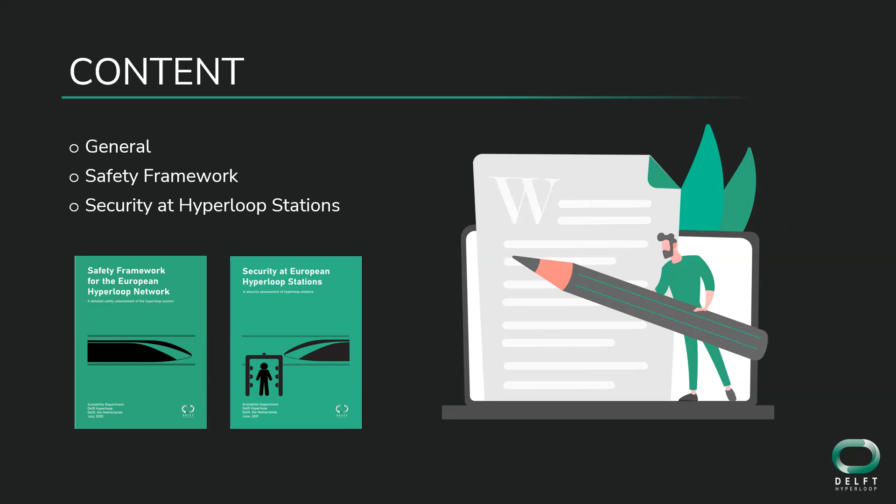This is us. We are a team of 39 highly ambitious students. Most of us take a gap year to work in this team. We're called a TU Delft Dream Team, and we work one year towards a model. We have different departments. The engineering department works on this model, integrating different subsystems into a working pod.

With that pod we're going to participate at the EHW, which is the Hyperloop competition, and we are also part of that competition, not with the pod, but with research that we perform. So we are working one year towards the EHW, and we're working on two research papers. And this is who we are.

Tonight, we represent Scalability. That's our department's name. And we are with two more. The mission that we have is that we want to make an impact by exploring a realistic implementation of the Hyperloop system. So, like I said, we are the research department of the team, and we're working towards the realization of the Hyperloop system. The goal is to write the two papers that are going to participate in the competition. One paper is focused on a socio-economic topic, and the other paper is focused on a technical topic.

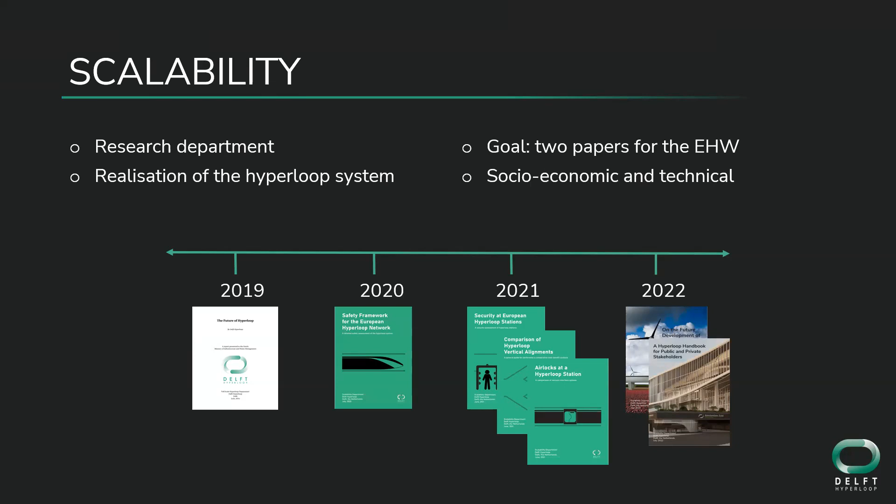Research has been done in the past by our team, because every year the team switches, so all students are replaced with new students. So we're going to present the work of a team in the past, and that's about safety and security. It's a very important topic as it's a new technology, and the pod is possibly filled with passengers, which makes it even more important to have thought the safety and security really through.

It's also very broad because it should answer every question of what happens if. So what happens if there is an illness? What happens if there's an explosion? What happens if, well, you can fill it in for yourself. There are a lot of possibilities. So what we will discuss tonight is a general safety analysis and security of the Hyperloop station. I will do the first part and Twan will do the second part.

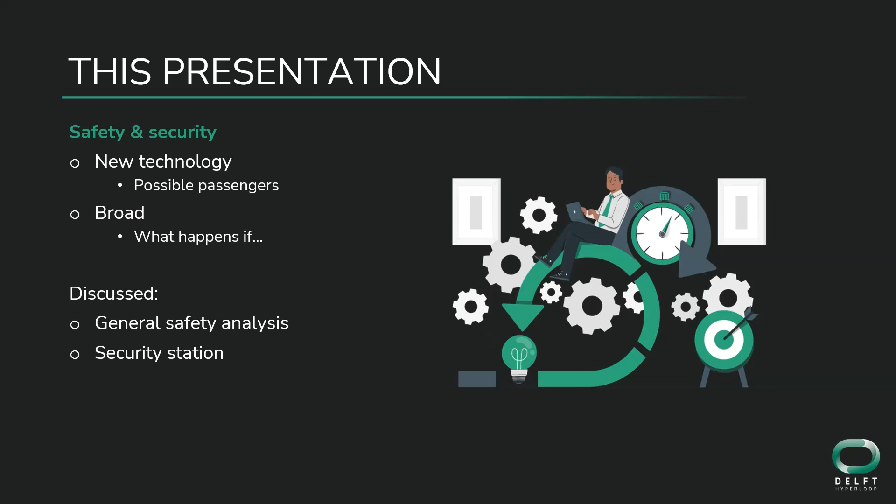What Delft Hyperloop did, they wanted to have this safety analysis, but for that to be done, you need the safety vision. The safety vision states the European Hyperloop system shall have at least the level of safety of European commercial airlines in terms of passenger fatalities per billion passenger kilometer.

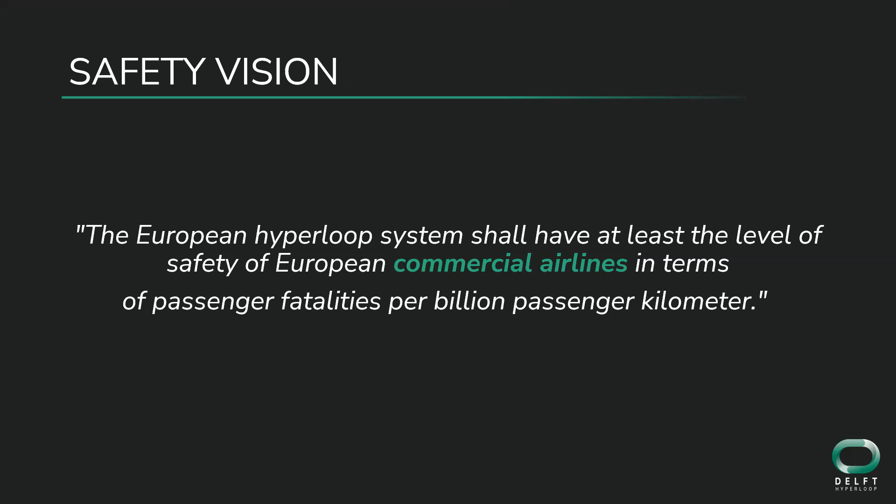Because it's a new transportation mode, a lot has been compared with what's already known. So in this case, the vision is compared with airlines because it has the highest safety of all transport means. So that's why the Hyperloop also aims to be that.

This is the safety framework that has been used. Every part shows a way of how to work with safety and what needs to be done. So you have different aspects. Proaction means an unsafe situation needs to be prevented, and that can be done through the circle: prevention, preparation, mitigation, intervention, aftercare, and evaluation. By working with that cycle, you can ensure safety.

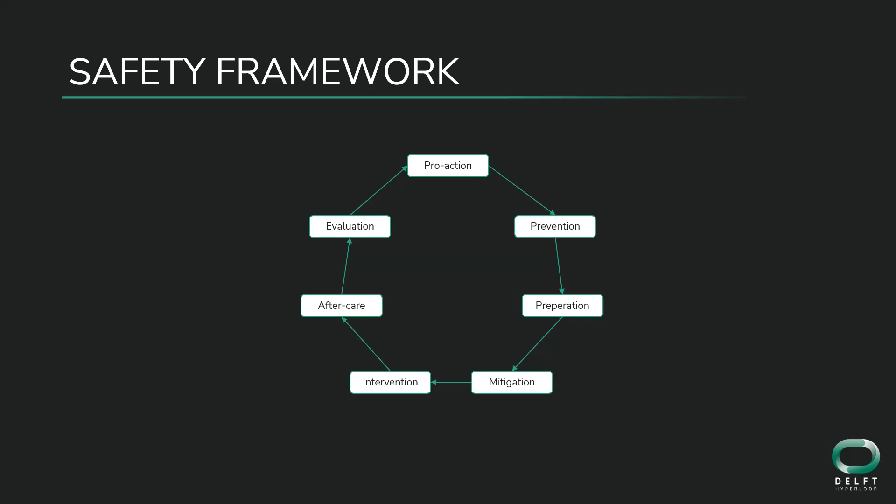So from the safety vision, a safety goal was defined, which states the passenger fatality per billion passenger kilometer will be 0.06 or lower. The 0.06 is also compared with airlines, because the passenger fatality there is 0.06. So that's what Hyperloop should aim for.

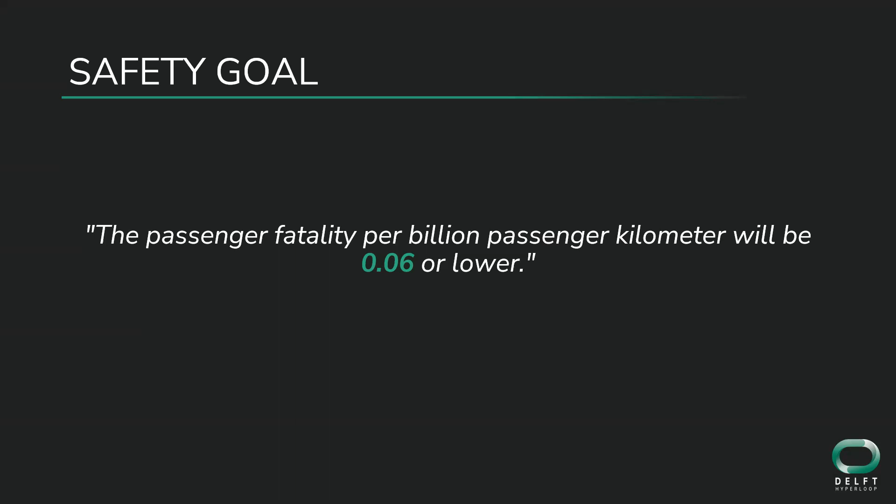Now about emergency scenarios. So there are quite some. The first one is fire in the pod. This can, for example, be due to the systems heating up, like the batteries. So that needs to be taken into account.

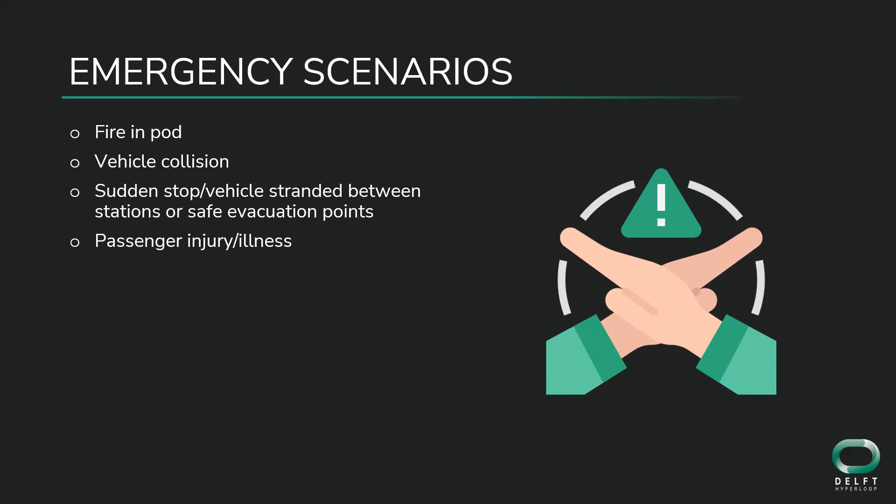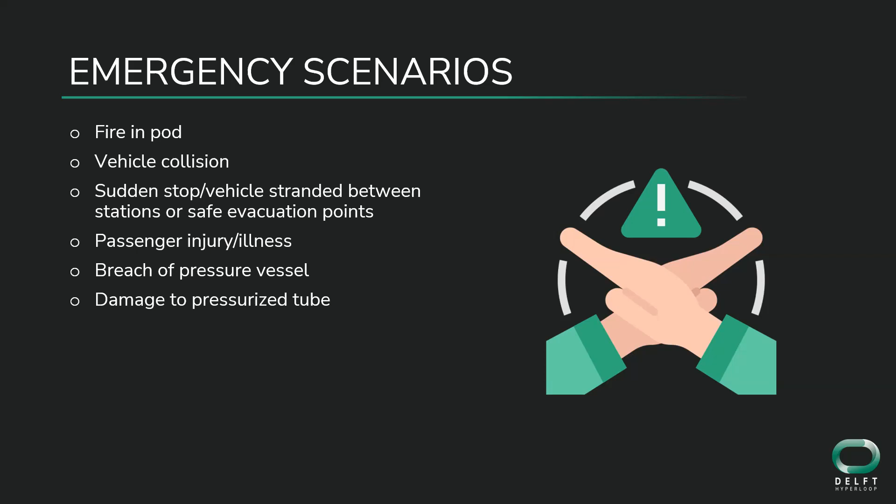Vehicle collision is the next one. This can, for example, be the case when the braking system fails or the propulsion system fails. There are multiple reasons for this to happen. Sudden stop of the vehicle, or vehicle stranded between stations - what should happen in this situation? Passenger injury or illness, breach of the pressure vessel due to, for example, an explosion, and damage to the pressurized tube, for example because a vehicle encounters the tube for some reason.

So we're going to include quite some aspects of the safety approach in the next slides. First of all, fire safety. This is one of the emergency scenarios I just stated. It's mostly about the areas with atmospheric pressure. Within the tube there isn't a lot of air, so the chance of getting a fire is quite low, but it's still possible, so it should be taken into account. But within the report they focused really on the atmospheric pressure areas.

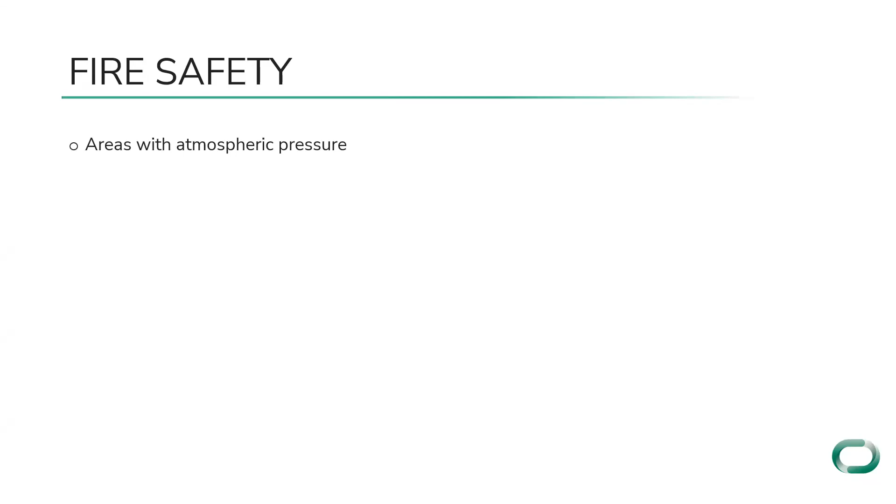So they looked into the required safe egress time. This is the time needed for passengers to safely evacuate a fire situation. They applied that to their analysis and came to this conclusion.

There are multiple ways to control the fire. The first way is to prevent it through flame retardant materials. However, this is not always a way to make sure it doesn't happen. So when there is going to be a fire, you need to be able to detect it through multiple ways - you can use smoke detectors, for example.

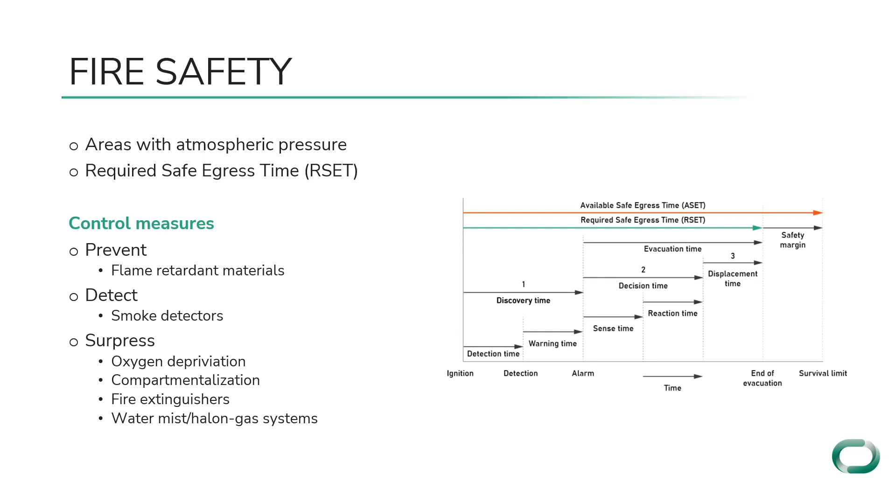When there is fire, you need to suppress it. For example, with what's visible on the slide, you have oxygen deprivation. This is of course not done in a passenger area, but more in the systems area. A halon gas system is used for the batteries, and fire extinguishers can be used by the passengers, because the pods are automated, so the passengers need to be able to know how to use those, but they will be available. And compartmentalization, which means the systems and the passengers are divided from each other, so that's where, for example, the oxygen deprivation is possible.

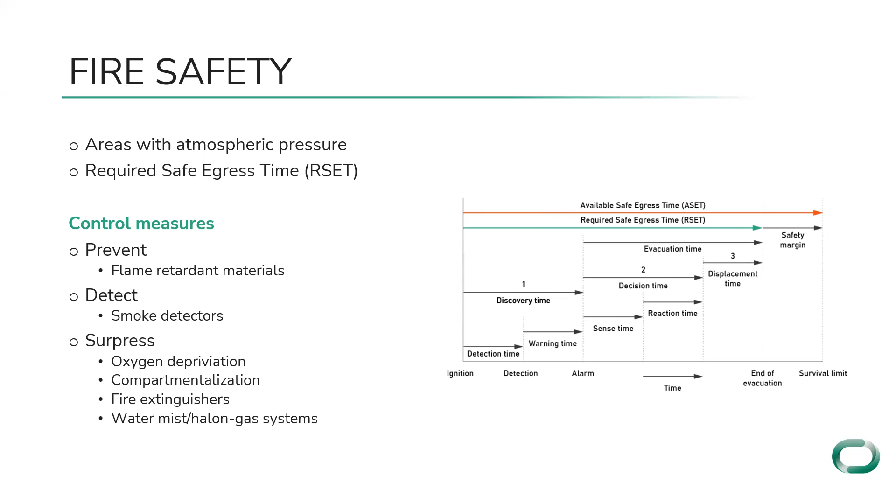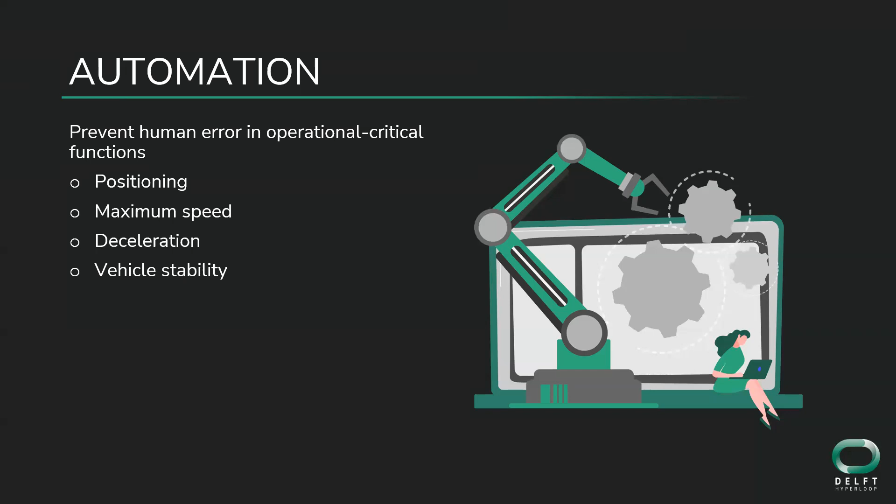So, like I said, it's advised to automate the pods because it prevents human error in operational critical functions. What's visible on the slide are the ways the pod can be automated, also advised through the report: positioning of the pod, maximum speed, deceleration and acceleration, and vehicle stability.

So also the communication is discussed. This is very important as the pod is automated - it needs to be completely able to function on its own. For that you need a lot of communication systems and connections as well. So there are quite some requirements to this.

You have the peak data rate, which is dependent on the amount of passengers. It's 2.5 Mbit per second per passenger. So for a whole pod, dependent on how big your pod is going to be, the peak data rate also changes. The handover success rate needs to be more than 99.9%, so it needs to be nearly perfect. Handover means the process of transferring an ongoing call or data from one channel connected to the core network to another channel. And then the cell range, compared to high-speed rails, needs to be between 1 and 12 kilometers.

And finally, the latency for critical services needs to be smaller than 50 milliseconds. This is only for the critical systems. For example, for the internet for the passengers, it doesn't really have a big latency. It doesn't really matter that much for that.

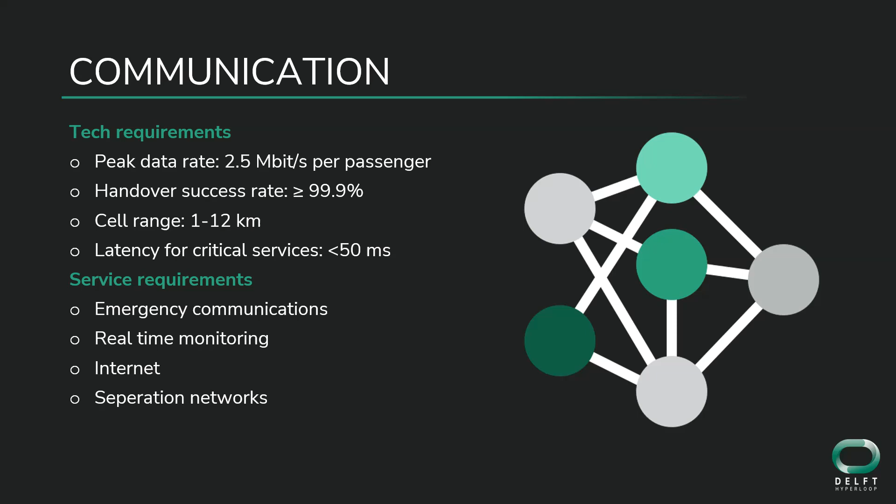So for all that communication between the pod and the tube, that can be quite difficult. So they went into the possibilities there, and they found that the light fidelity communication system is the most preferred. A binary signal is made from the flickering of LEDs, and the LEDs are able to function within the vacuum environment and within certain distances from each other.

So that was very useful. What is visible on the slide is a possible design, or more like an explanation of how this communication works. So you have the internet and the server, and the control center and the control data, which influence the base station, and the base station again makes sure that the LEDs are flickering in the right binary signal, which makes sure that there can be communication.

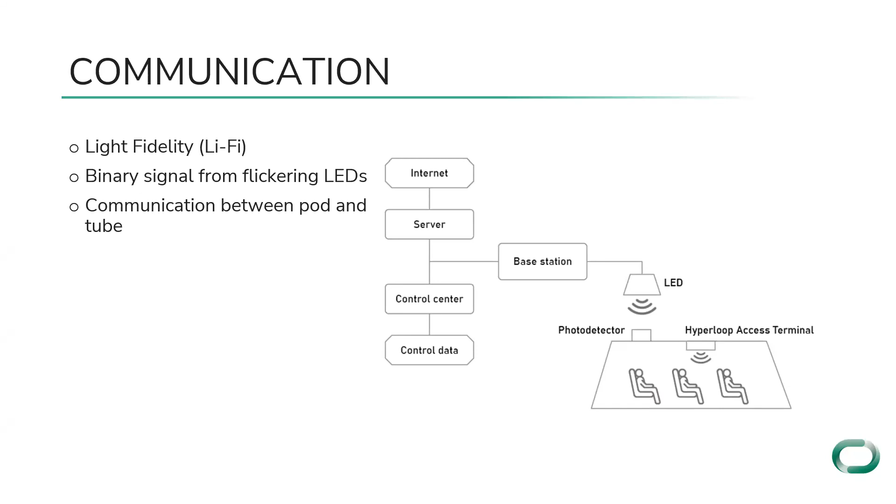They also thought of ways for passengers to evacuate during emergencies. So there was a difference between an in-pod and a brick wall emergency. In-pod means that the functioning of the system still works, but the passengers are in danger, for example, due to a passenger being aggressive. And the brick wall emergency is when the functioning of the system is failing and the pod itself cannot reach a station or a safe haven.

So they thought of that. So the safe haven is one of the possible concepts. It's found in metro systems as well. It's kind of a station within the infrastructure. And there are multiple ways to do this. You can have an internal safe haven or an external safe haven. The external safe haven does include extra infrastructure, but it is more advised because...

The operation itself doesn't have to stop if one pod fails. It kind of stands beside the tube and other pods can still pass. So yeah, that would be more preferred.

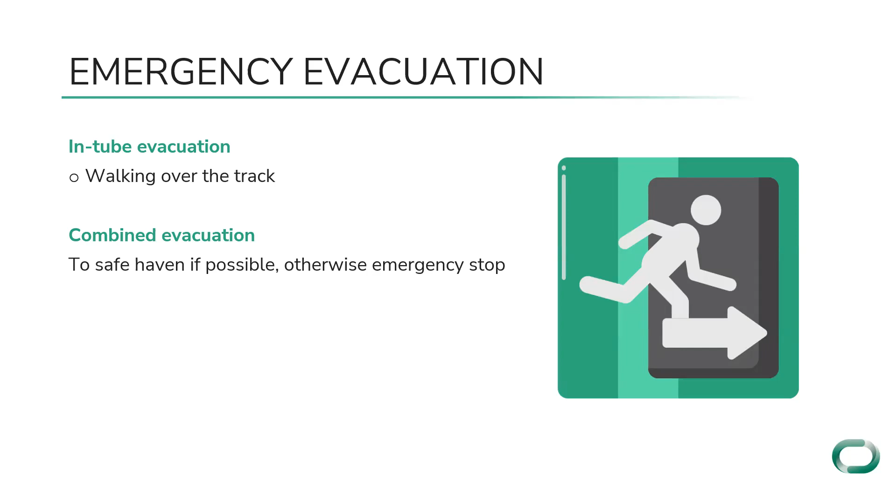And the most advised option was a combined evacuation. So like we saw, when there's a brick wall situation, the pod cannot reach a safe haven, so then the in-tube evacuation is preferred. But with in-pod emergencies, the safe haven works perfectly. So yeah, it depends on what you want, but as we said, the safety vision is quite high, so a combined evacuation plan is preferred.

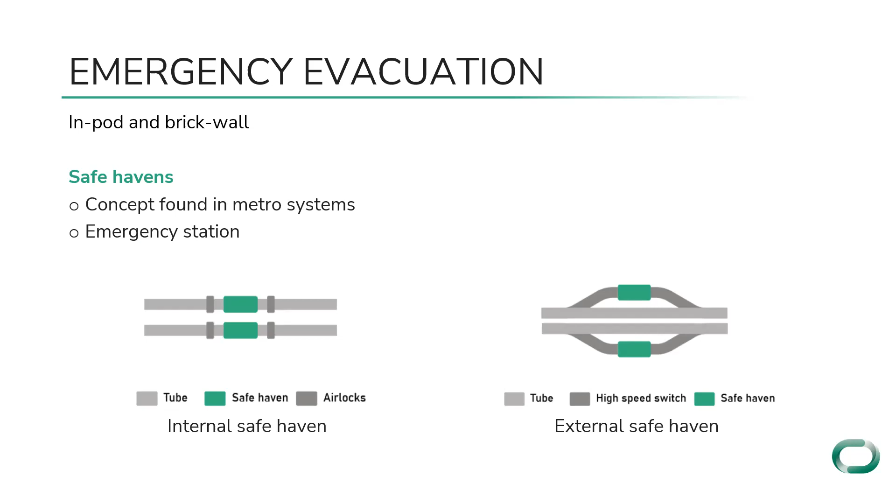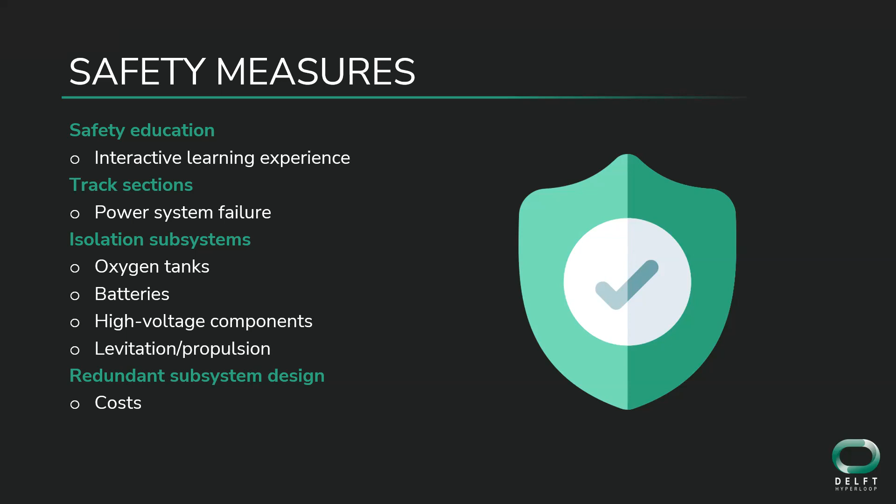And finally, a redundant subsystem design would also be preferred. This is, however, very costly. So an overview needs to be made of the different subsystems to look into which subsystem needs to be most redundant. But yeah, so that comes with cost, but is also very much preferred.

This was a lot of information. They made all that information into, besides those safety measures that I just showed, safety packages.

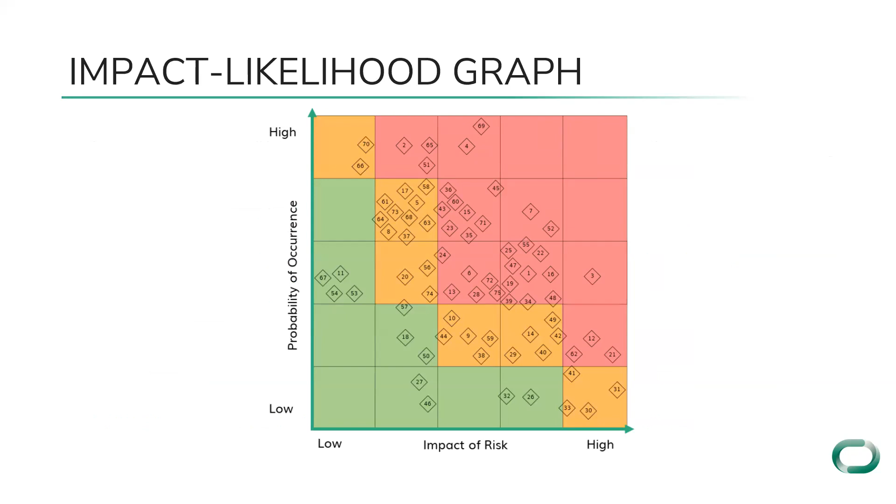But first I'm going to discuss risk assessments, because they also researched the different risks that come to be in a Hyperloop situation. So what they did is they looked into the likelihood of different failures, ranging from occasional to frequent, to not really likely to happen. There were also impacts, dependent on the type of hazard and the severity. That was created for different failure modes, and the likelihood and the impact together went to a risk score, which is put into an impact-likelihood graph, showing which failures should really be looked at, and which are quite okay and aren't really likely to happen, so don't need a lot of attention when making this safety approach for the Hyperloop.

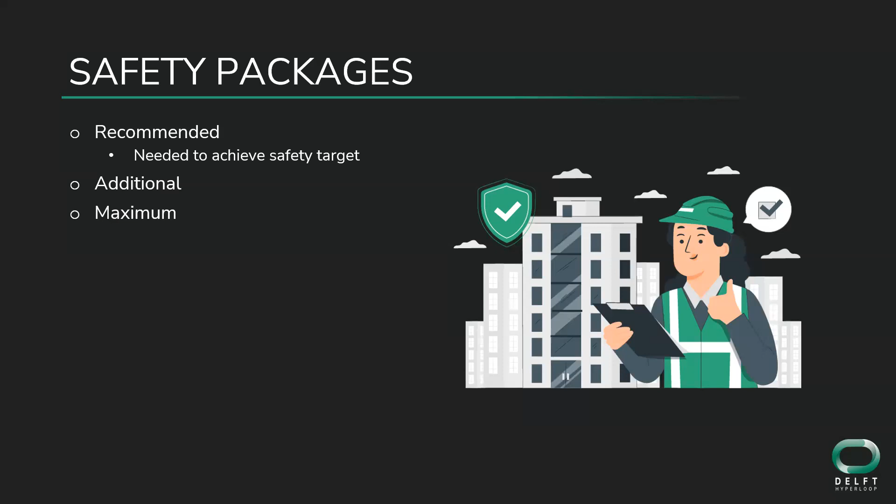And then Twan is going to continue - there will be time later for questions if you have any, but first, the security.

Maybe we can ask you, Twan, to speed up a little, because - yes, I saw the clock. I'll be a bit faster than Sarah. Sorry, Sarah.

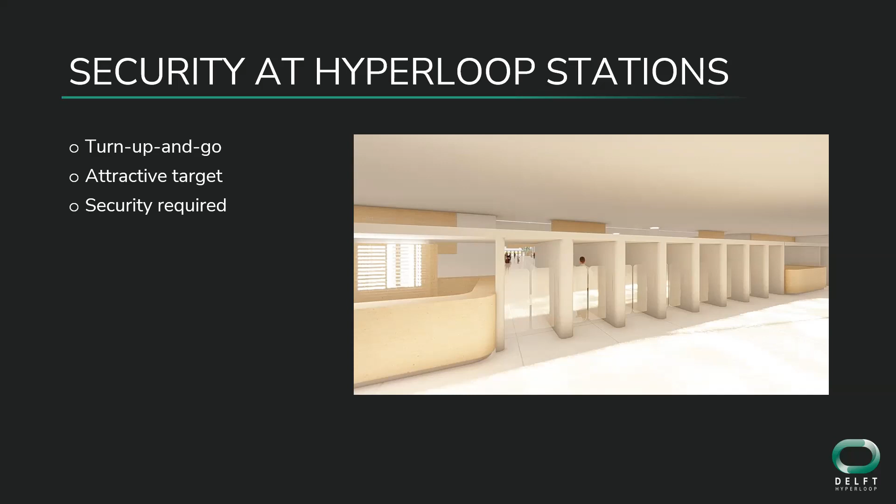Our previous predecessors have envisioned the Hyperloop system as a turn-up-and-go system, to keep the speed of travel. On the other hand, you want the Hyperloop system to be safe. It's quite an attractive target, for example, for terrorist attacks, because it is both very fragile and used for international travel. So this poses security requirements, and these are two quite conflicting interests, and therefore in this research a threat and vulnerability risk assessment has been performed, and I will go through that very quickly.

Then for each of these combinations, the criticality of each asset is determined in the criticality assessment, and also the vulnerability to each threat and the consequences of each threat occurring on this asset is assessed. All these are then combined into a risk score. Then finally, possible measures are considered - what could we implement in a station, and how does this influence all the risk scores? Based on this improvement of risk scores due to several measures, some measures are actually recommended.

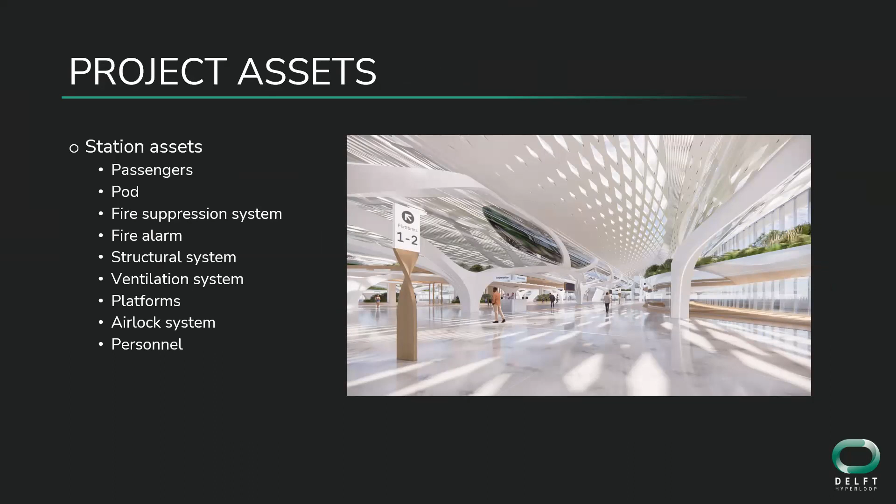So first I'll go quickly through the assets that have been considered. We have, of course, the passengers, the pod, but also the fire suppression system - you want to be sure to extinguish a fire in case necessary. Don't forget the structural system, so the station needs to be structurally stable. And all these other systems, for example the airlock system, which is not unimportant in a Hyperloop system.

I'll go quickly through that because it's quite a summation. Also for the threats - what could possibly go wrong? Someone could bring a bomb, that could be, for example, a suicide bomb, but also a luggage bomb could happen - this is what happened at the airport in Brussels. Another thing that could go wrong is an armed attack, or an attack with chemicals even, although that's not very common these days anymore, but you don't want it to happen anyway. Criminal acts are way more common, so for example stealing, and arson is also not preferred.

I think finally we have an attack on a control room, which is quite more modern. So that could be hacking the system. That could be quite catastrophic as well.

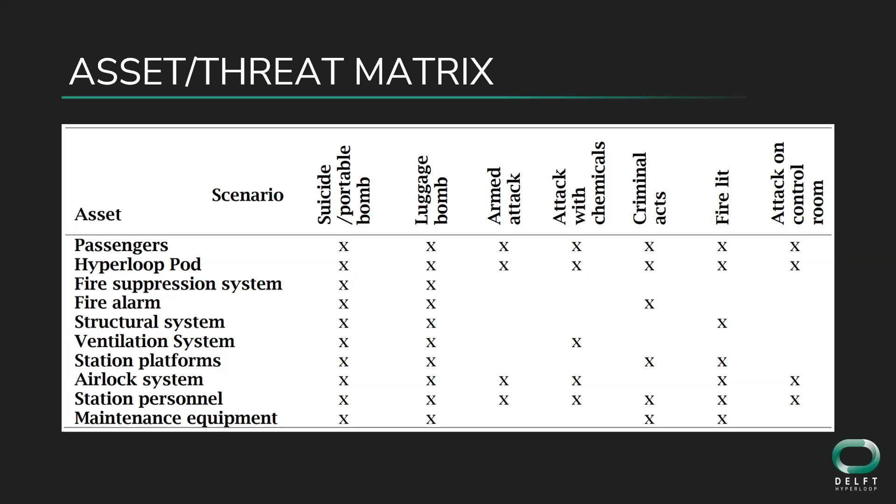And in this case, they have included the criticality of the system, which is the factor C. This basically means how critical is the asset for your system to still operate. For example, you need your station to be accessible for emergency services. This is only relevant for a certain asset and is not really influenced by the threats.

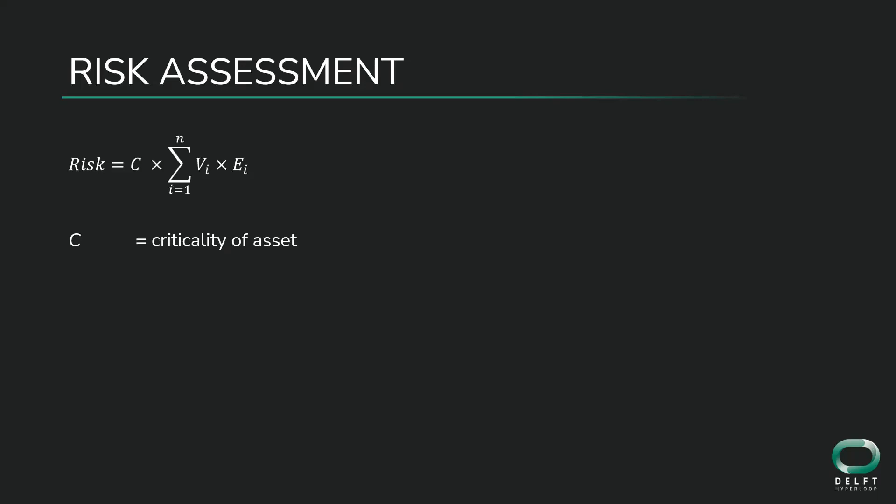Continued in the formula, you can see a summation over I until N, where I is a threat and N is the number of threats that are relevant for a certain asset. For each threat, the vulnerability is determined - how vulnerable is a certain asset, for example, to a portable bomb. Then it is multiplied by what would happen if the bomb would actually go off, which is the effect or the consequences of the threat on the asset.

Yes, we will do that now. Some of the safety measures that have been seen in other modes of transportation are these: baggage screening and passenger screening, which we all know from flights. We of course need personnel for that screening, but this personnel, the security personnel, also has to be screened in order to make sure that they are not a threat themselves.

We could impose identity checks, which is performed in international travel already, but not so much in national or Schengen travel. It might be good to look into how that is allowed within the EU, for example.

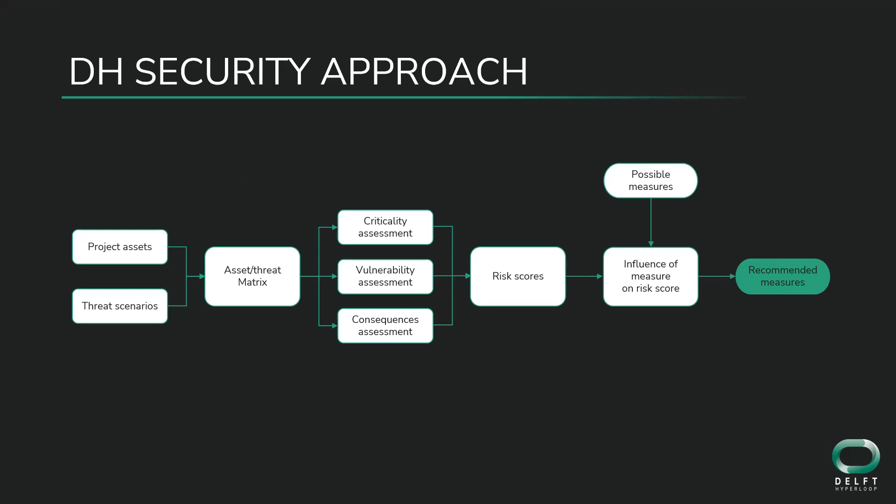Based on this, they have reassessed the risk scores, and from this they came to four recommended safety measures: screening of people and luggage, so the same as at an airport; also screening and educating the security staff; additionally, they would like to add CCTV security cameras, preferably combined with artificial intelligence in the future.

And they would like to impose identity checks, but they put a little side note that it might be difficult within a single country. When you travel internationally or outside of the Schengen area, you would of course automatically check identities, which helps greatly to check whether people are not on a blacklist or something. So that was quickly our safety discussion.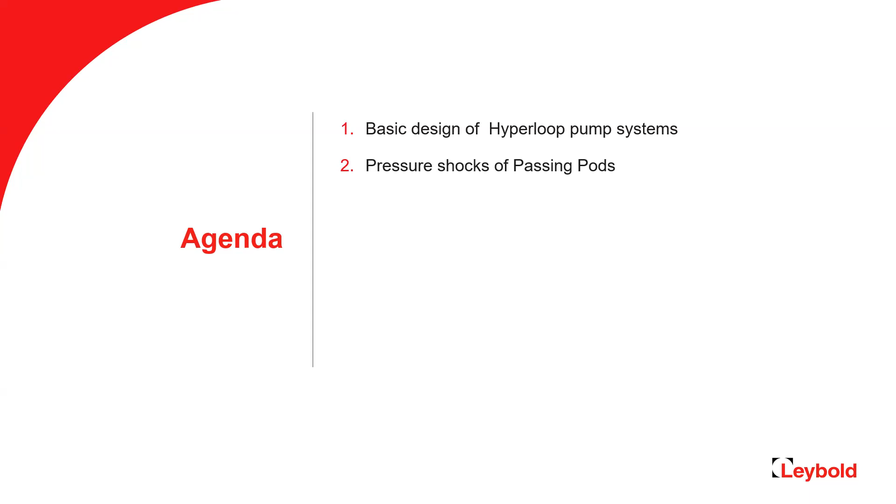Let me start with the first one, design of Hyperloop pump systems as we do it. When we talk about Hyperloop pumping systems, we have two major operation points to think about: the pump down of such a tube or of a load lock chamber, and then maintaining operation pressure, whether it's 1 millibar or 10 millibar, which is basically just pumping away leakage.

You'll never get these tubes completely airtight. There will always be a leak, and these leakages have to be pumped away to maintain the pressure. So for the following example, let's talk about a section of tube with a length of 1 kilometer and a diameter of 4 meters. Let's say operation pressure is 1 millibar and we have a total leak flow of 200 to 400 SLM. These are arbitrary values, but they're not completely off from what we've seen in the pump systems or applications we've supplied pumps for.

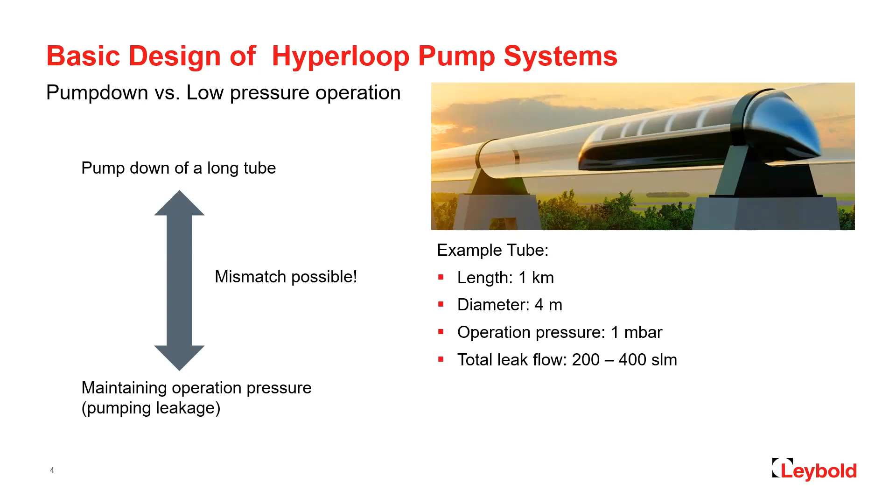So for these operation points, I have to get rid of the video line here because I can't see anything. So we have different options.

Starting from the left, the easiest option would be just to have a lot of dry vacuum pumps—pumps that compress air towards atmosphere—and use as many as needed to pump away the leakage at 1 millibar. For this example tube, we'd come to 24 of these dry screw pumps, the DV1200, which are actually two pumps in one big box. So in the end this would be 48 pumps, quite a big number.

A second route would be a backpack solution: a roots pump, which compresses about a decade in pressure, from 1 millibar to roughly 10 millibar, combined with the dry vacuum pumps again. By compressing the leakage from 1 to around 10 millibar, you'd need 4 of these big blowers, followed by 4 of the dry vacuum pumps, directly stacked on top of each other. In total this would be 4 pumping systems with 4 big pumps and 4 boxes—8 pumps—so 12 pumps total, compared to the 48 pump units on the left. Same pumping speed at 1 millibar, but just a fourth of the pumps.

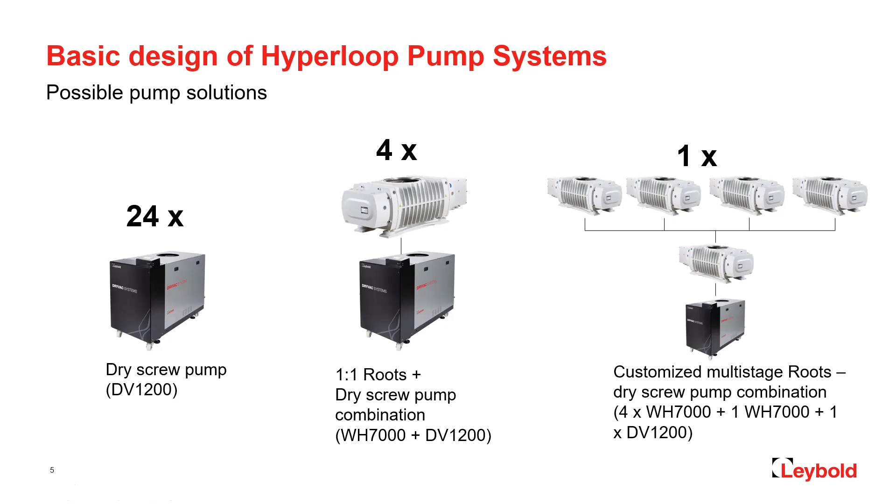Here, one DV1200 pump at the bottom. So one of these big box pumps, so with two pumps in there. So in total you would have four in the first stage, one in the middle, so five, and then seven pumps. And all these three vacuum systems have the same pumping speed. So it's a clear thing: you would go for the pumping system on the right, but it's not always that easy.

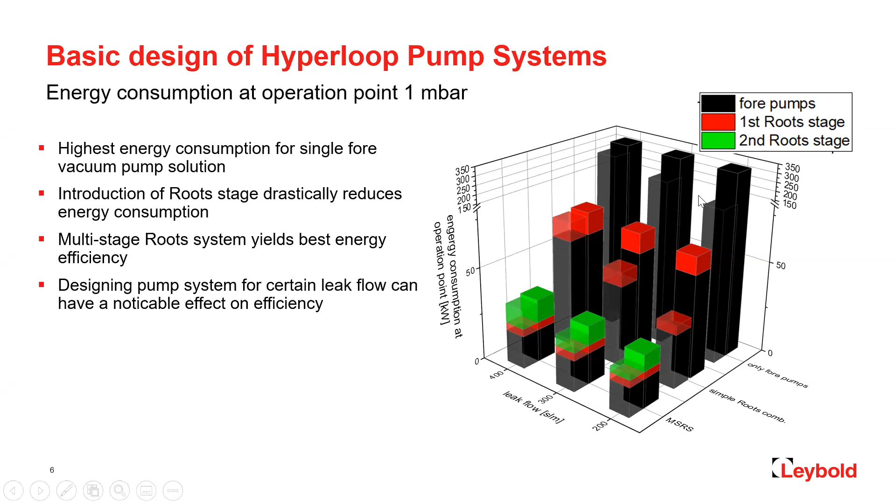So you can see regarding energy consumption at these low operation pressures, it would again be a no-brainer. Why would you need these bigger pumping systems here with just fore-vacuum pumps? But let's have a look at pump down performance. So you want to pump down a given chamber. So here we have the tube of one kilometer, and four meters in diameter. So how long would it take with these pumping systems to pump down these tubes?

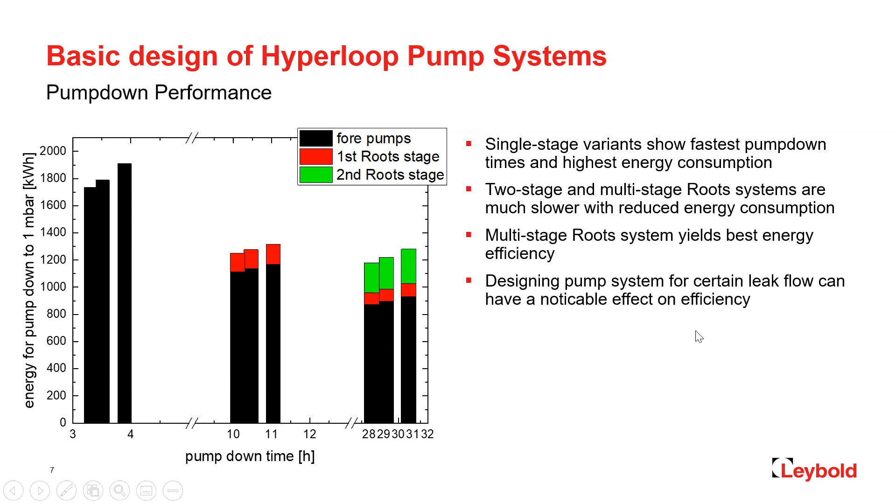So although all fulfill the pumping speed requirement at 1 millibar, you wouldn't take all of them for a load lock system, for example. For a load lock system, you would lead the pump system with many more fore-vacuum pumps that can pump down these chambers really fast. And for just the operation of the tube, so having the pump running at low pressures all the time, you'd use a multi-stage roots system, because the tube itself you wouldn't pump down too often, or you shouldn't pump down too often, because it'll take much longer, or you'll have an inefficient pump system.

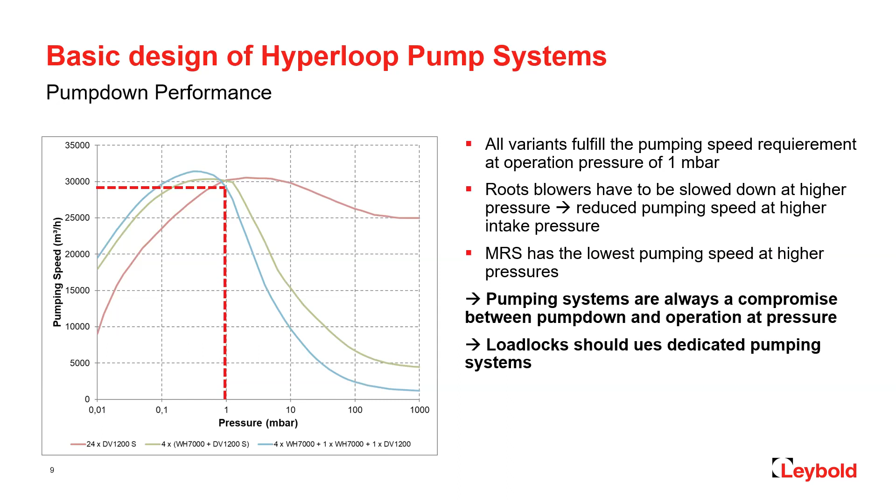Yeah, so you can see pump systems for these applications are always a compromise between what you want to reach, so between pump down and operation pressure. And you can also see that if you are using load locks, you should definitely think about using a dedicated pumping system and not try to use the pump systems you have to maintain your operation pressure for pumping down the load locks, because they're just not as efficient at pumping at high pressures.

Blockage ratio is the ratio between the diameter of a pod divided by the diameter of the tube. So usually we're talking about round objects here. Of course, there might be variations of this. There's an extensive number of studies, most of them numerical, that describe the effect of different blockage ratios on pod aerodynamics. I'm not going into detail about that here. Aerodynamics, you might know much more about this than I do.

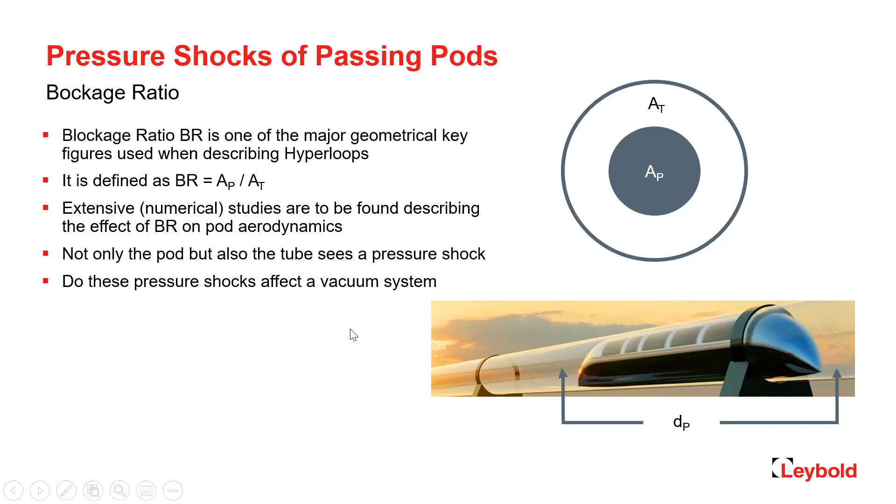But not only the pod sees a pressure shock or a difference around itself, which will for sure affect the drag it sees, but also the surroundings of the pod will see this pressure shock. And of course, if you have vacuum systems connected to such a Hyperloop tube, these vacuum systems also see a pressure shock. So what happens now to a vacuum system if it sees such a pressure shock?

So what might be a possible risk? If you have these pressure shocks coming into such a roots pump, you will also roughly multiply the pressure of this pressure shock by the same ratio as you have normally. So if you say you have... then the pressure shock will also be compressed by a factor of 10. And this can harm the motor shaft, bearings, or other parts of the pump. The extreme would be venting such a pump.

So just going from operation pressure to atmospheric pressure at the intake, then you will have atmospheric pressure at the intake of the pump, and it will be multiplied with factor 10, and then you have 10 bars of pressure at the intake of the following vacuum pump. It's not very likely, but for sure the vacuum pump would be destroyed by that.

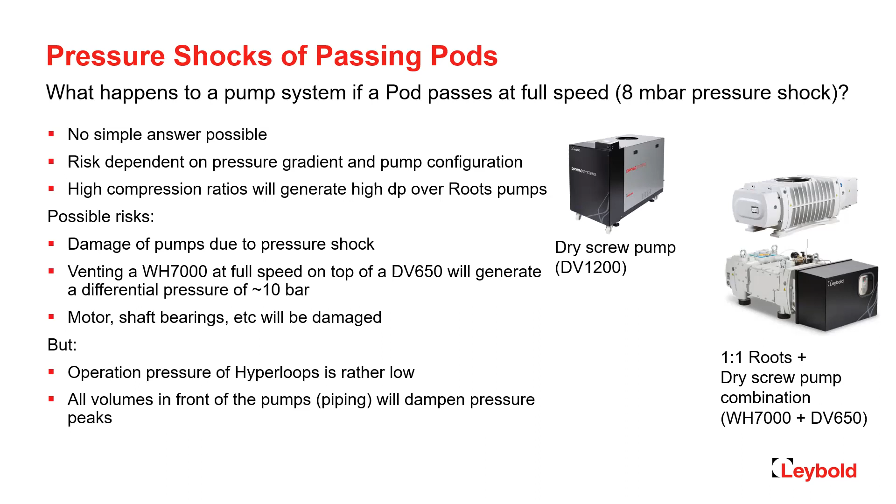So if your operation pressure is really, really low, below 0.5 millibar, you could say, no matter how big the compression, there's hardly any risk for the vacuum pumps. If we're going higher in pressure and depending on the compression ratio, you might see a light impact. So the frequency converters of the roots pumps will slow down the pumps because the pressure differential, delta P, is so high.

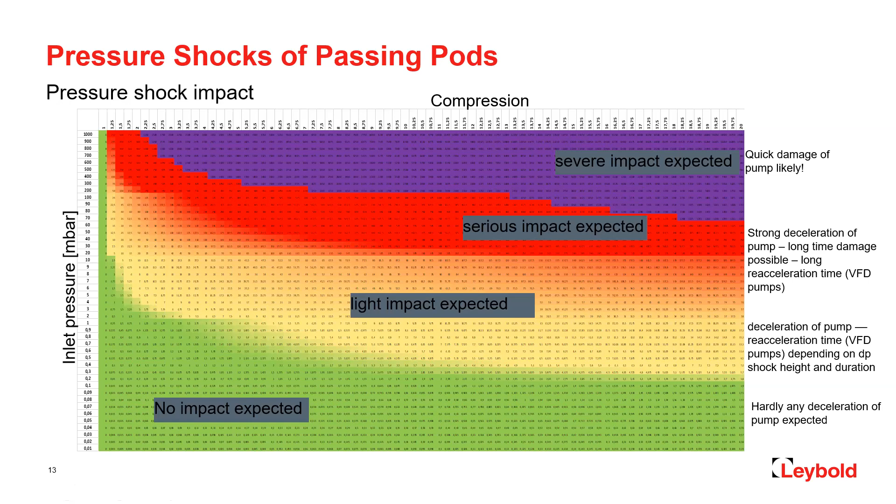If it gets even higher, you might see long-term effects, so that bearing life is not as high or something like this. Or at really high values, but here we're talking about above 100 millibars of inlet pressure, such a pressure shock would most likely kill the vacuum pumps, so any pump that would follow such a roots blower. So this is a very theoretical plot, but how would it look for a realistic pumping system?

Can you see my mouse? I don't know. Can someone please confirm? We can see it, yeah. I can also use the laser pointer here.

Okay, so we have the main tube. We have such an operation leakage system, you could say, a multi-stage roots system connected to the tube. A short bit of piping, the first stage, a manifold between the first and the second stage, and again a manifold between the second stage and the vacuum pump. And then you can see we already have additional volumes which will dampen these pressures.

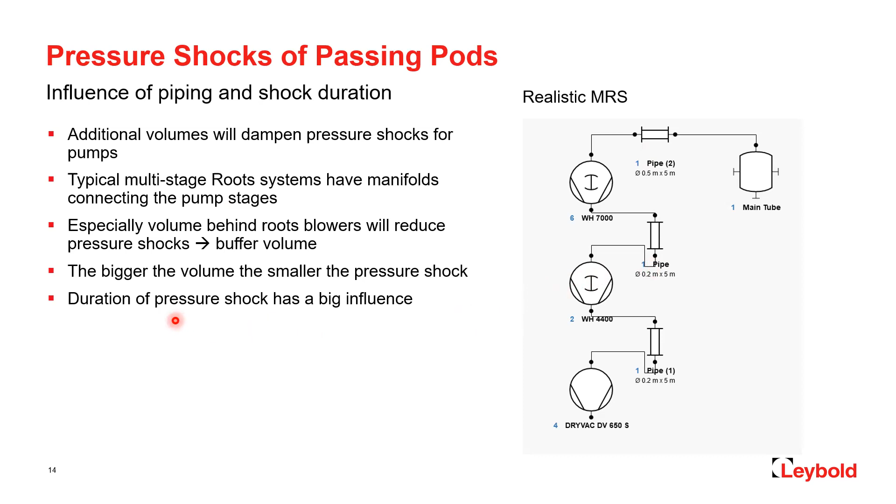And let's see what influence we'll have on the operation pressure of the system. So of course there's an effect of the duration of the pressure shock. So let's see what happens if we have a pressure shock of 8 millibar for just 0.1 of a second.

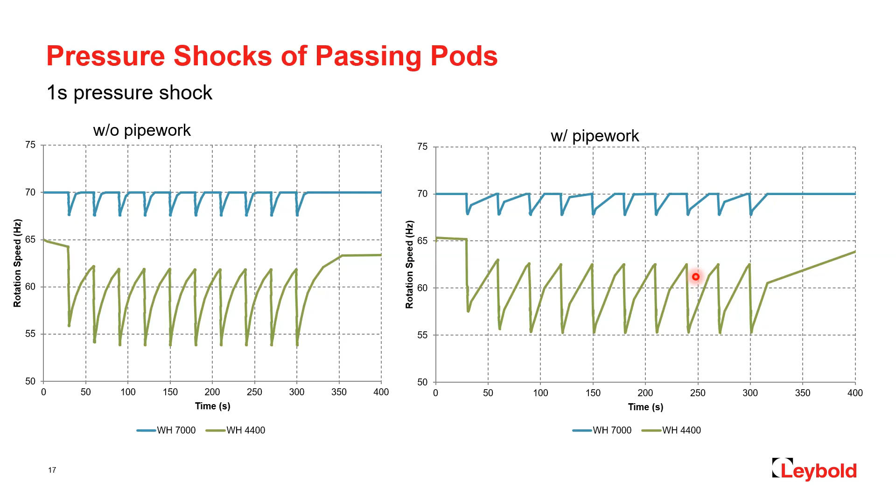Well, thank you very much for that great presentation. I'm loving to hear about those challenges. Well, I don't love that we have those challenges, but I love to hear about them and see that somebody's thinking about them. Maybe I can just say on the last presentation there was said likeliness of failing vacuum pumps, the likeliness of 4. I think it's much rather a 2 or 1. So it's not very likely they'll fail if you use our pumps.

I just wanted to ask if the pressure shock is really that long, if that really will have such an impact on the whole system itself. There's probably some people doing aerodynamics that could tell us how long those pressure shocks will be, rather than the 0.1 seconds or the 1 second long pressure shocks.

Well, we have a lot of questions here on Slido, so I'll start with you, Sebastian. We first have a question that is more general, but then I'll follow up with a more specific question. So they say, what are the current research optimization fields of vacuum pumps, and what is Leybold currently looking into? And then the second would be, which design would be a Hyperloop specific design, when you want to go to a final pressure level at around 1 millibar. So a pump that doesn't reach those very low pressures that you can reach with the setups you have right now.